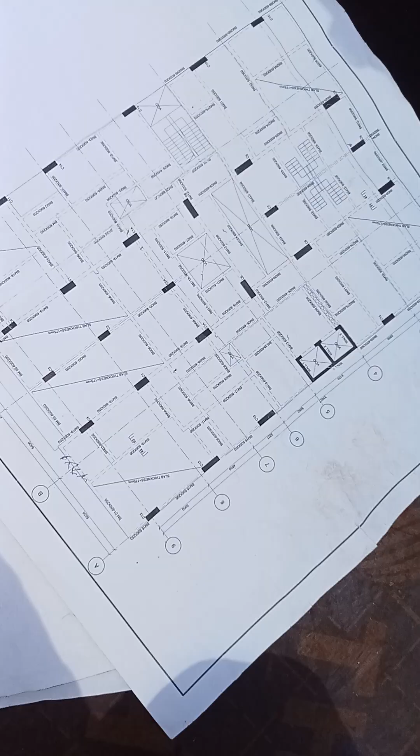Good afternoon. Today I want to pass you through some structural engineering drawings here and show you how you can read and be able to understand and fabricate the beam on site. Today, our formwork is done. You can see our formwork is done, so we're beginning the steel work today.

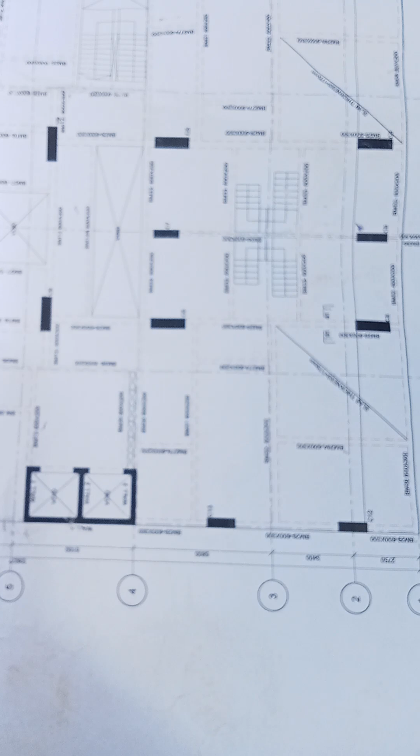And to pass you through, this is beam 31. You can see this is my leaf, this is my drawing. Maybe my drawing on my phone is not very clear, but I want to make sure you understand. So this is beam 31. You can see beam 31, 600 by 250, and you can see this is what we have done. So this is beam 31.

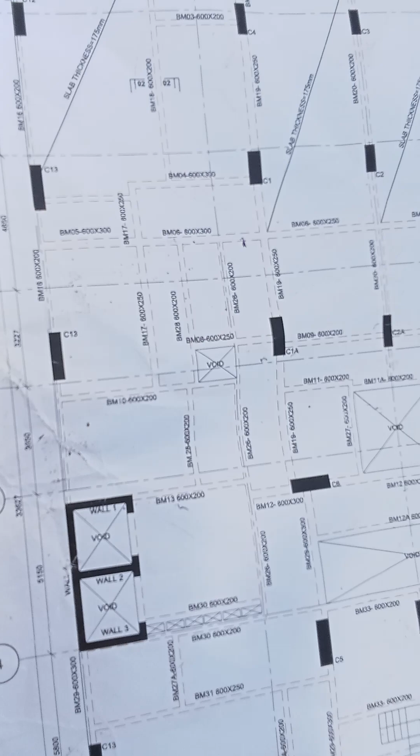First of all you go to what's called the beam layout. This is our beam layout drawing. It is where you're able to identify what beam you're working on. So as you can see, just here is my lift area. Look at my drawing. This is my lift, and this is after the lift here. This is beam 31, this one here. You can see my finger. Beam 31 is running all the way. You can see it goes until this column here.

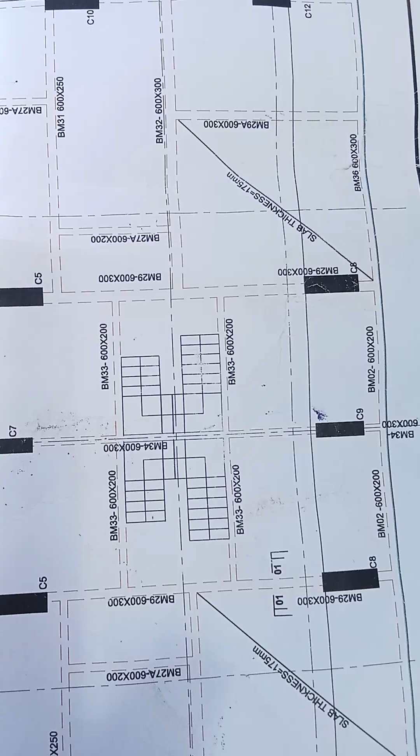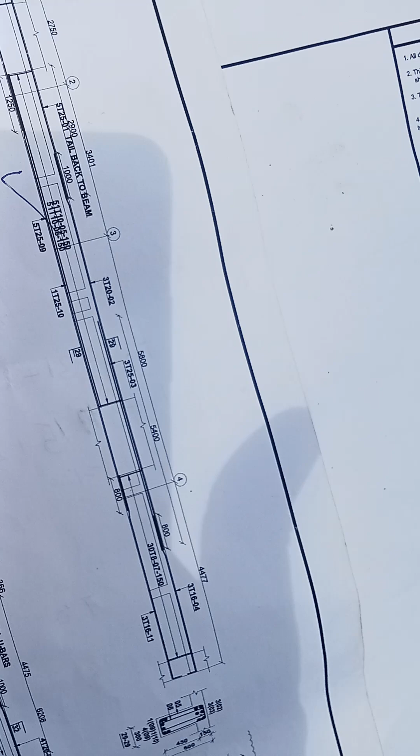Now after identifying your beam from the beam layout, you come to what we call the beam detail. Now this is my beam detail. You can see these are beams already drawn and detailed. So here you come and identify what reinforcement is needed within that beam and how you go about them. Now I want to zoom you straight to beam 31 in our beam detail. This is beam 31.

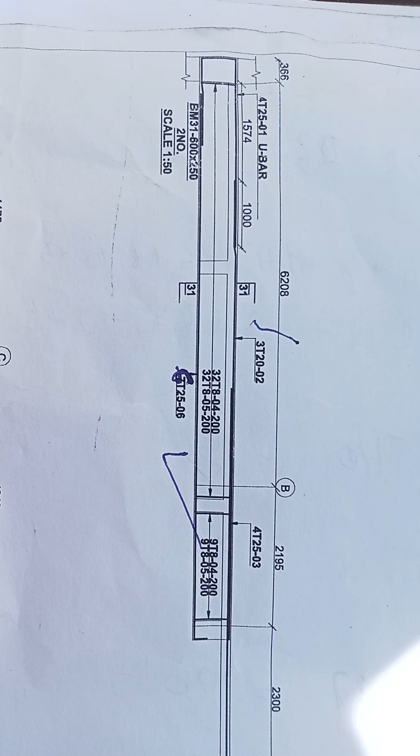If you look clearly on the beam 31 detail, the engineer is telling you that for beam 31, you need to be able to identify the most important things. You need to identify the grids on that beam, so you know where your beam is starting and where your beam is ending. And the second thing, after identifying the grid, be able to read the section. You see, there's a section there, 31. He has cut a section through that beam.

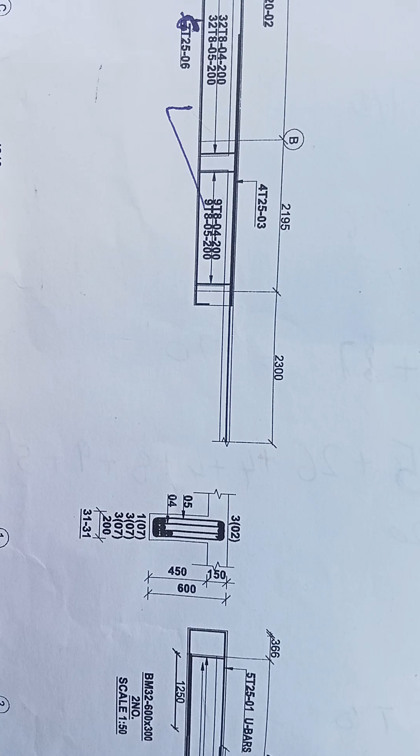So if you go in front of that, you're able to see section 31 there, and you can see on top of it those are bars, and 1, 2, 3 and 07 in the bracket is what we call the bar mark. The bar mark helps you to identify the shape of that bar and how you're able to fabricate it. A section gives you more detail of a structural element.

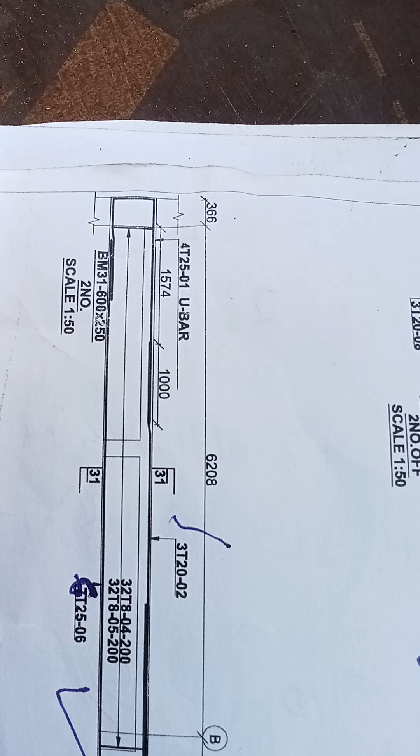Now if you look closely at beam 31, look at where the arrow is pointing. The arrow is pointing at a very thick black line. That is structural reinforcement steel. That's how it's always drawn on the drawings. You can see that he's saying 4T25-01 U-bars. So he has already given you 01.

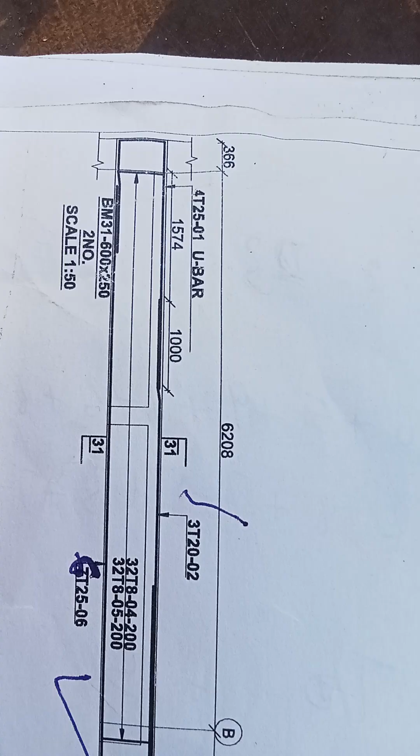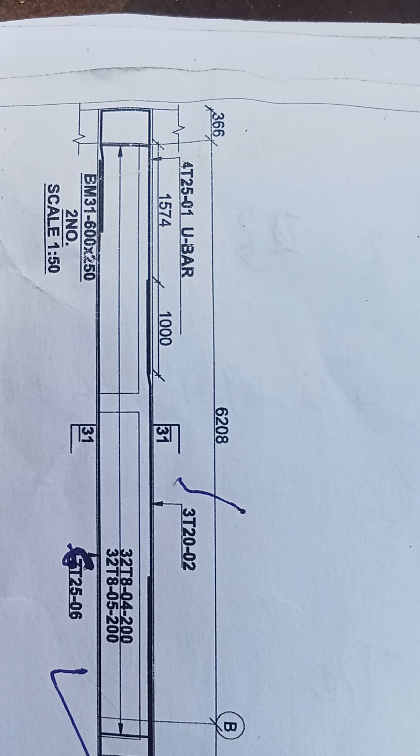01 is the bar mark. 4 means 4 in number. T is a letter that says that's a high tensile steel twisted bar, and 25 is the size, the diameter of that bar. And he's putting dash 01. 01 is the bar mark.

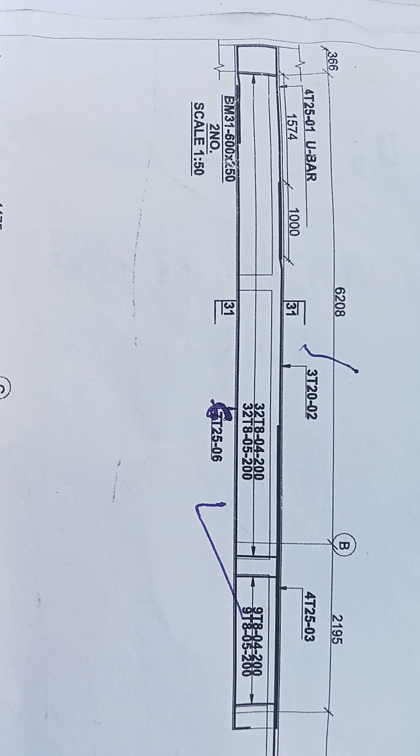The bar mark helps you to identify things like the shape code of that bar, the cutting length, the sizes, and sometimes gives you the number. If you go to what's called the bar bending schedule, you're able to find the bar mark, and the bar mark helps you to get the shape code of that bar. But it's already given you that this is a U-bar.

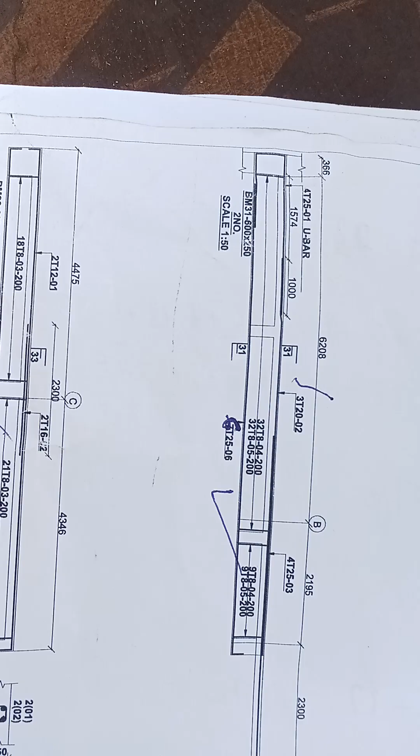And if you go a little bit in front, after the section cut, you can see here it's telling you 32 T8-04 at 200. So what does that mean? It means that those are rings. Your rings are 32 in number, and T is a high tensile strength twisted steel bar. 04 is also the bar mark of that ring. It helps you to identify the shape and how you're going to fabricate it.

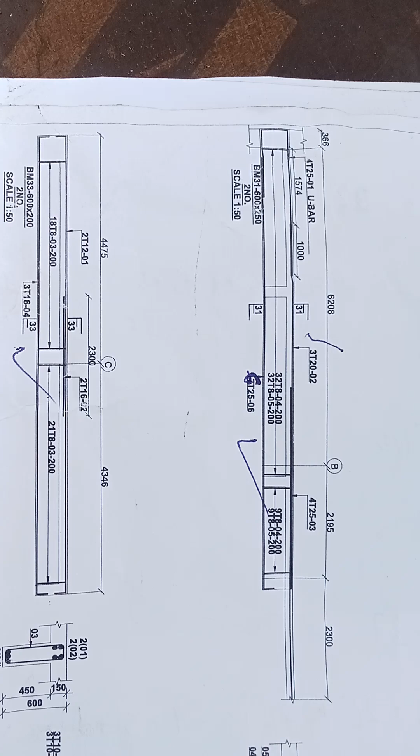The lengths of that ring, for example, I'll be able to show you here on the beam clearly. And if you go down, it's telling you 200. 200 is the spacing, center to center. So you measure from the center of this ring to the center of the next ring. It's supposed to be 200.

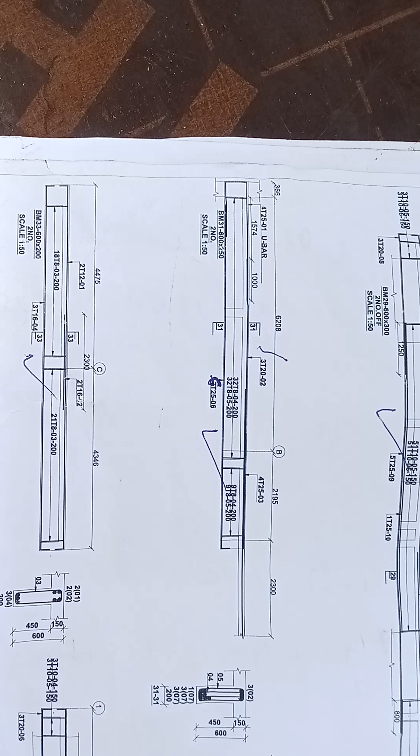And if you go in front here on the beam, it's also telling you 4T25-03. What that means is the other bars are four in number, T is the high tensile twisted steel, 25 is the diameter, and 03 is the bar mark of that steel.

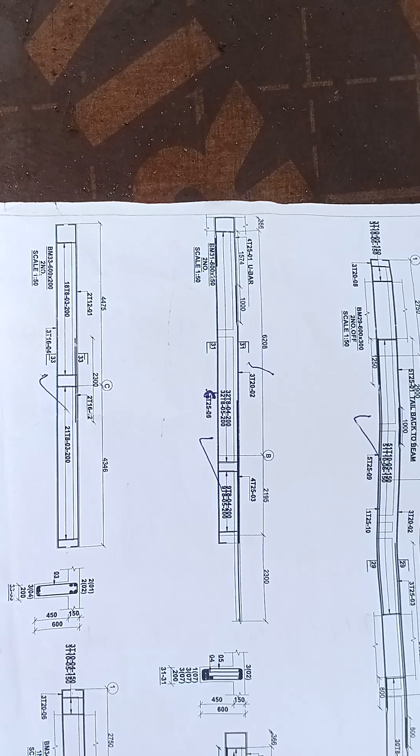So a beam can have different bars with different shape codes, and you're able to identify them through the bar mark of that bar that is indicated. Now 4T, let's go back to the U bars. 4T25 U bars. Now I want to take you close to the beam here.

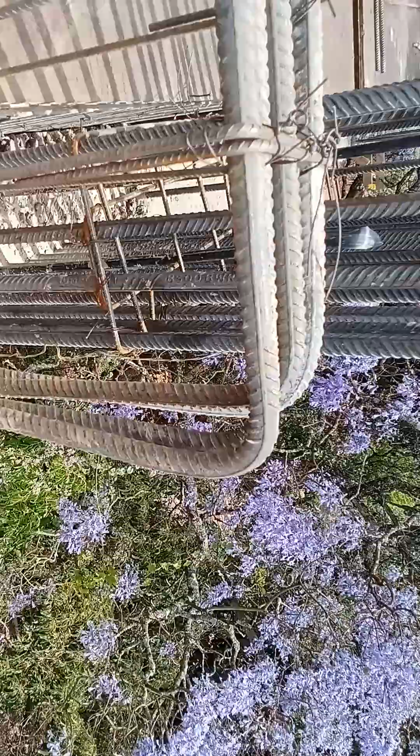You can see this is our beam. If you count where the beam starts, you can see there are four in number: 1, 2, 3, 4. And if I twist my phone, you can see this one is a U bar, which means it is continuing. It's fabricated in the form of a U, like the letter U of our alphabet. And if you look closely into the drawing, you'll see how far that U bar is going in the structural detail.

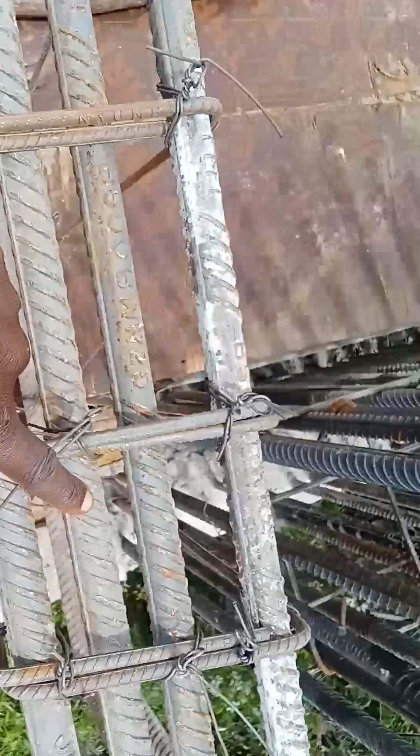Now you can see these are my rings. It says T8 at centers of 200. If you measure from the center of this ring to the center of this other ring, it is supposed to be 200 spacing. Now you can see we're able to fabricate that beam like this: 4 T25 U bars, with rings of T8, center to center 200. You can see this is how it goes.

You can see the U bars are running all the way. If you look at the drawing that I have shared very closely, the U bars are going just after this other beam that's meeting beam 31. The top U bars are going just a little bit after that beam. You can see that's where they are lapping. This is called an overlap.

Now if you come this side, you can see my bottom U bars are not going all the way to the other side. They are going a bit shorter. If you look at how it's drawn in the drawing I shared, the bottom U bars are not going all the way like the top U bars. You go in front of the beam; this is how the beam goes, all the way to this column here. If you look at that drawing very well, you'll be able to see.

Now if you come this side, it also says 4 T25s, what we call the L bars. Make sure that your L bars are at least 150 millimeters more, not less than that, according to the British standard. The L bars go and are anchored into this other beam carried by this column, so that the loads are able to move from the beam to the column without any problem. There are 4, which means 2 of them at the top and 2 of them at the bottom.

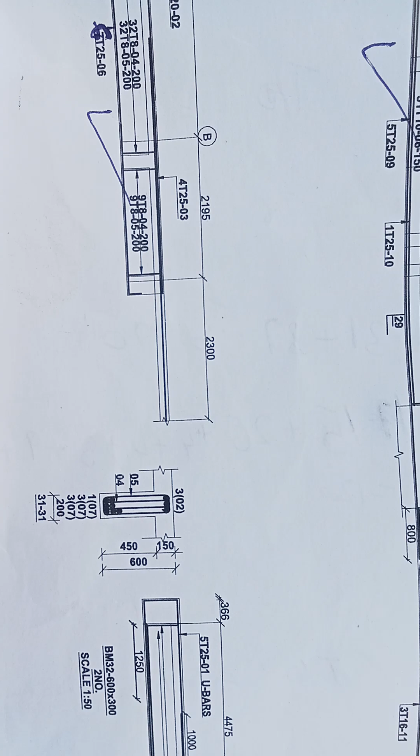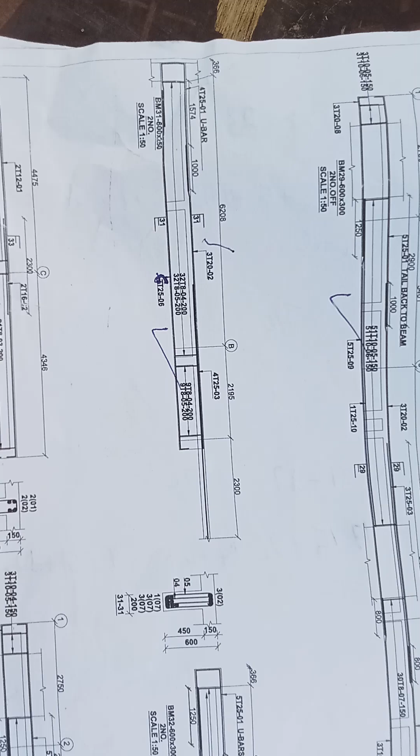If I take you back to the section of beam 31, you can see there are supposed to be 2 rings; we haven't finished the rings. One is at the center, and one is at the outside. There are 4 top bars, and the bottom bars are more, which means this beam is not yet done, but we are going to add more reinforcement within this beam. For now, I'll be passing you through more details on how we have done most of the beams on this slab.

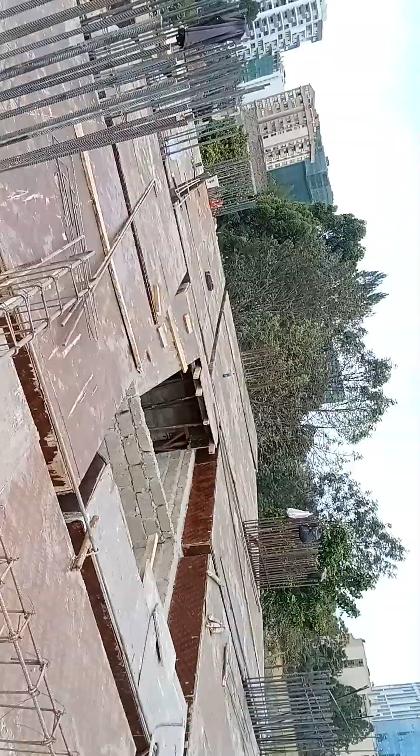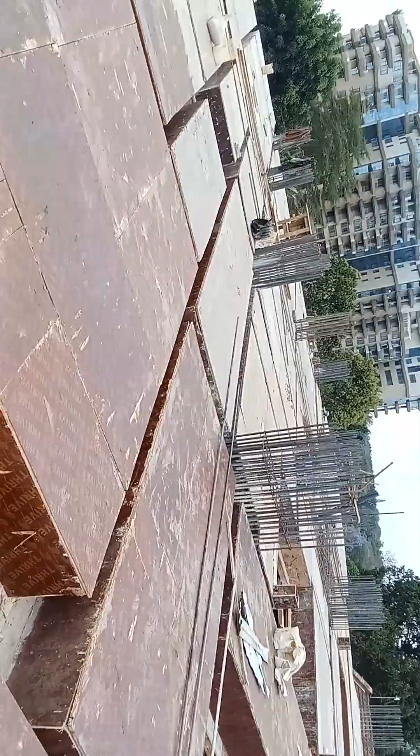You can see this is our slab. The formwork is ready, everything is ready. The guys have gone for lunch. I'm using this time to share with you some knowledge, so you can advance your career within the construction and civil engineering industry. These beams are all ready for reinforcement; we started just today, and we are trying to push and see how far we can go.